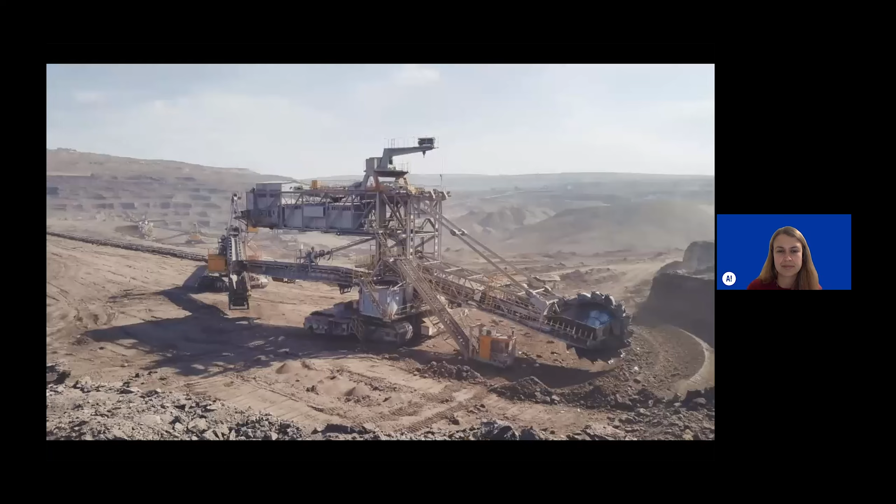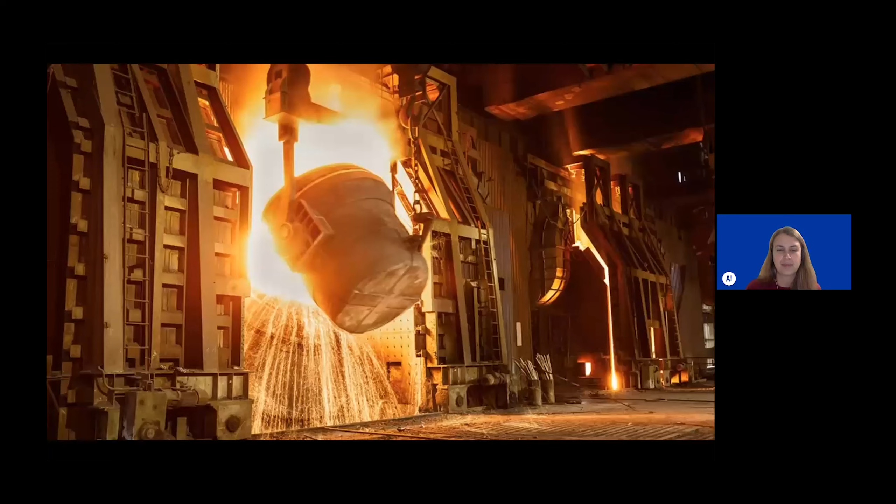So first off, what is embodied carbon? Well, it's the materials and processes that cause greenhouse gas emissions through the whole life cycle of a building or piece of infrastructure. This includes material extraction and mining, transport to manufacturing and processing, transport to site, construction on site, repair and replacement, refurbishment, demolition, deconstruction, transport to landfill, processing, and the eventual disposal of these materials and products.

Now I'm going to take you back to one of the slides we just pulled up there. This is the now permitted Whitehaven coal mine in Cumbria. It will be the first deep mine in 30 years in the UK. This will be extracting coking coal from beneath the Irish Sea for steel production. This is a real example of the link between buildings and the products we specify and the destructive processes that are still ongoing in this country and throughout the world. Embodied carbon emissions are a big part of this.

So through extraction, manufacture and construction - these are called upfront emissions. They're not all spread out over the process of the building's life like operational carbon emissions are, which means there isn't the potential to decarbonize and reduce these emissions later on. It's also really important to note that if you're working on a scheme that includes the demolition of a building, then the end of life emissions for that building will get added to the start of your project. So we urgently need to reduce these emissions in order to limit the devastating impacts of climate change.

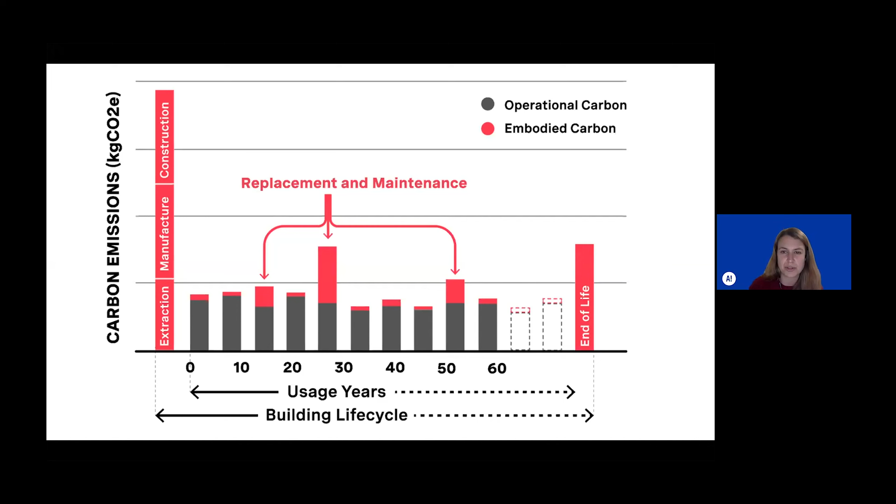ACAN also took part in the Future Home Standard consultation last year, as the proposals did not address embodied carbon in any real way. The Committee on Climate Change has said that substantial gaps and weaknesses remain in the government's set of policies for decarbonisation of manufacturing and construction, but there has finally been some good news.

The New London Plan has been approved, with policy SI2 referral scheme to undertake whole life carbon assessments using the existing methodologies to reduce embodied carbon emissions. Part of our campaign does encourage this policy to be adopted by local authorities for a wider range of projects. It's a great first step, but ACAN want to do more.

In order to start a campaign though, we needed to understand what has happened before and define a way forward. So we've produced this comprehensive report, The Carbon Footprint of Construction. This report sets out the nature and scale of the problem. It summarises the industry consensus on both lowering embodied carbon and the agreed methodology to measure. It sets out a series of recommendations with international precedents and a clear timeframe for policy implementation.

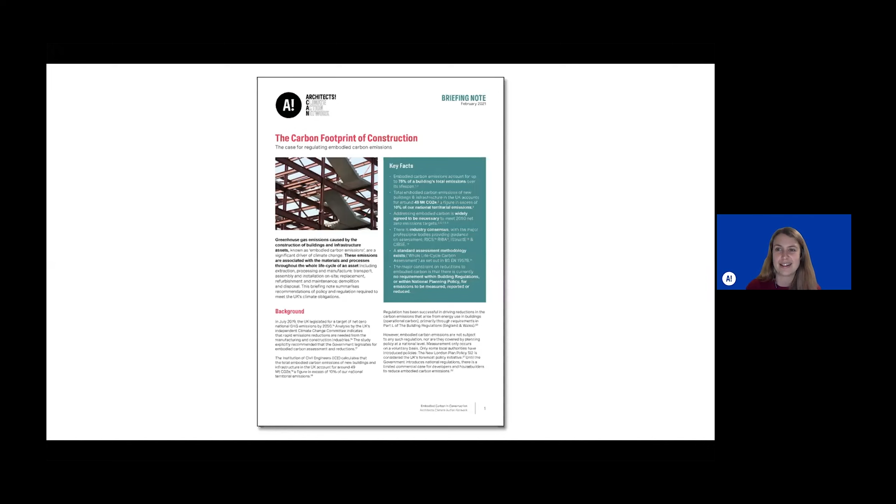For example, in France, they've introduced a regulation called E+C-, which has been running voluntarily since 2016. It requires the reporting of embodied carbon for all new buildings to take place this year, and limits will be brought in by 2024. It's a real example of how the UK government needs to take action now before they get left behind. And in order to help them do this, ACAN have set out a series of demands.

We demand that the government expands the building regulations to include a requirement to assess, report and reduce embodied carbon with a new Part Z. The government should also update Regulation 7 to introduce carbon limits on specific materials.

The National Planning Policy Framework should be revised to require whole life carbon assessments to be submitted at pre-app, full planning and practical completion stages. As an immediate measure, the New London Planning Policy SI2 should be adopted by local authorities throughout the UK.

And the government should create a freely accessible UK EPD database and require construction material suppliers to input EPDs for their products. This will ensure that as designers, we have all the information we need to make the right decisions. And the government should establish a freely accessible database for anonymised whole life cycle carbon assessment data of new buildings to ensure that lessons are widely learnt.

We've set out a time frame for when these actions should take place, and we've also looked back to see what's already happened to get us to this point. It's really important to note that in 2011, the British standard, which set out an agreed methodology for measuring embodied carbon, was introduced. And then in 2017, the RICS guide, Whole Life Carbon Assessment for the Built Environment, was published to give more information. ACAN are calling for the government to adopt the RICS guide

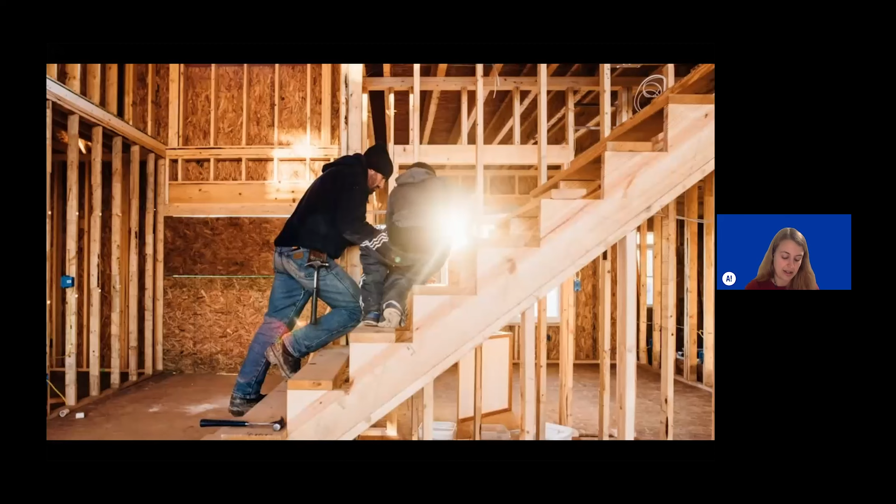There are also a series of benefits to these policies that go beyond carbon reductions. These include supporting the upcoming England tree strategy and boosting the UK's timber industry, creating green jobs in construction, forestry, production of UK materials, and science and innovation to explore low carbon alternatives, making construction sites cleaner, less noisy and less polluting, and providing an incentive to refurbish rather than demolish, supporting community cohesion.

The UK government's industrial strategy white paper said whole new industries will be created and existing industries transformed as we move towards a low carbon, more resource efficient economy. We need embodied carbon regulation to really enhance the opportunity that we've got here.

So what's next? We need you. Firstly, we need you to start talking. Talk to your clients, talk to your consultants, talk to your colleagues. If you're not discussing embodied carbon on a project right now, start.

But talking's not enough. The Department for Business, Energy and Industrial Strategy has reported that with profit margins and shareholder returns the overriding priority for the majority of large house builders, they will not upgrade their standards without being required to do so by regulation.

And that means what we really need you to do is become part of our campaign. Head to our website where you can see our Regulate Embodied Carbon campaign. From here, you can read our report, you can sign a petition, you can download the 2-pager and send it to your MP. We really hope that you become part of this campaign and we can move this forward.

I'm going to hand over to Seb, who will introduce some fantastic speakers and also run you through these actions in more detail. Thanks very much.

Now, if we look at architecture over 65 years, I would argue that we are well behind the curve in terms of innovation and development of thinking. So on the left there, you've got a London office building, 1955, 1970, and buildings going up today. And the conceptual thought, the philosophical thought, I would argue hasn't really changed at all. In fact, the building on the right probably has a higher embodied carbon than the one on the left.

Of course, it is probably more efficient operationally, but still it is fundamentally treading the same path. We have not had the innovation. And I would argue that all of those, in any event, are obsolete in terms of climate change.

If we look at this slightly more closely, on the left you've got a house built just before the First World War, by a well-known architect at the time, typical of things found all over Europe. Twenty years later, the Villa Savoye on the right was built by Le Corbusier. In between the two was an existential crisis, World War I. The building on the right is massively different in philosophy, design, shape, color, the whole lot. It is showing enormous progress.

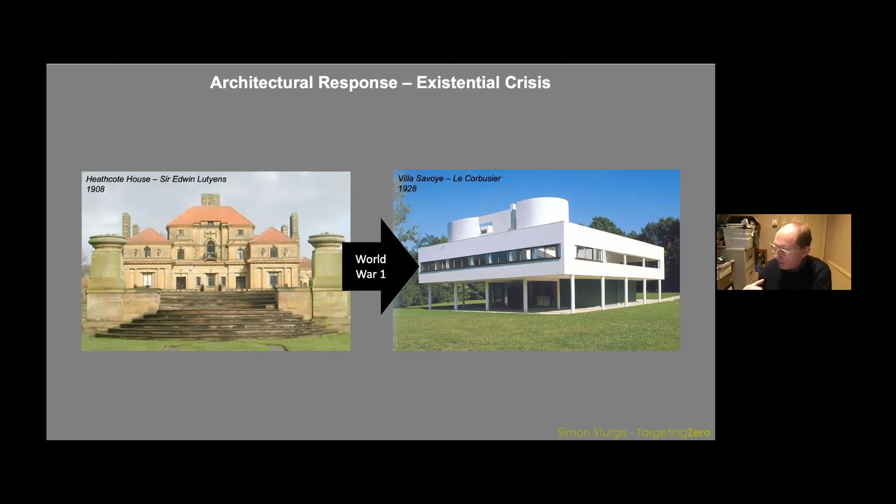But if we look at what's happened over the last 90 years, from the Villa Savoye to the House of the Year 2019, very little has happened. I don't want to pick on the building on the right - I'm just using that as an exemplar of today's architecture. I would argue not much has changed. Of course the insulation has got a bit better, and in that intervening period, around 1970, we had the oil crisis, so yes that introduced things like insulation and double glazing. But fundamentally, as a piece of design, that building has not progressed to the same degree as the change in the previous example.

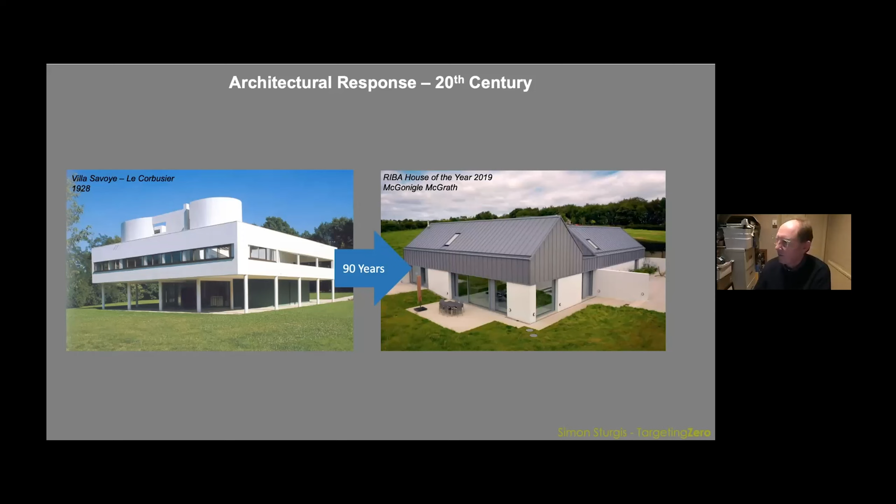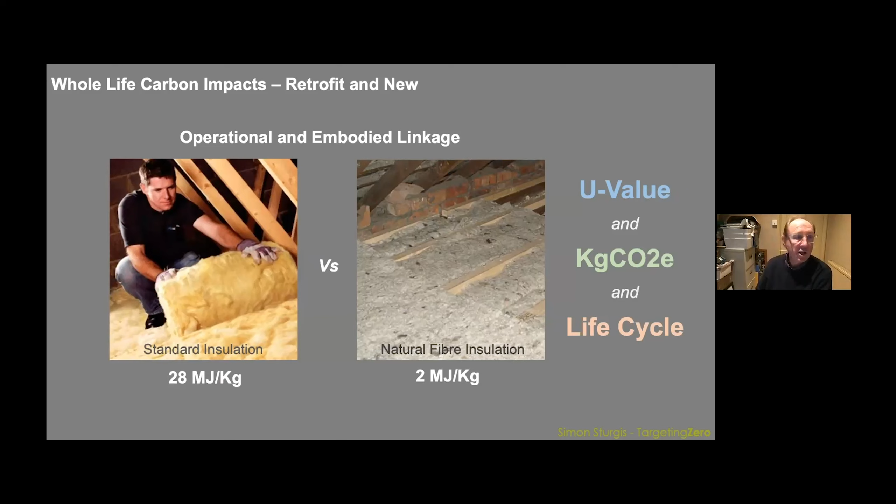So, the architectural response - I'll show you this as one example.

And of course, the building on the left compared to the building on the right is grossly inefficient in terms of material used to enclose space. It is also grossly inefficient in terms of the likely operational issues that come out of it. But certainly in embodied carbon, it is really problematic. But interestingly, the one that probably will win the prizes is the one on the left, as opposed to the one on the right, which is not that exciting, but it is compact, it's efficient, and it will do a good embodied carbon job for enclosing space.

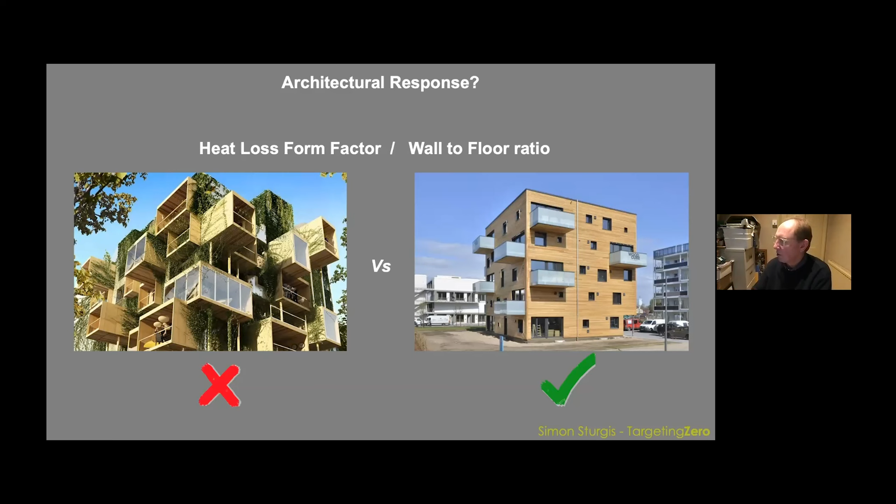A word on cost. One of the problems we face constantly is the fact that sustainability generally is seen as an expense. And I think this is generally because it's meant additional things, like you have to add things onto buildings, PVs, triple glazing, additional insulation, and so on.

But this was a study we carried out for a developer in London. This building was actually completed when we did the study. On the right there, you can see four columns. The left-hand two columns represent, on the left with the figure 850 on top, the as-built carbon cost of that building. The next one, with 506 on top, represented a range of options that could be chosen to reduce the carbon footprint of that building. It would have looked the same.

It would not have involved radical technologies. It would just have been a question of choosing better materials and using them more intelligently. And on the right there, you've got the as-built life cycle emissions. Now, the interesting thing is that 41% reduction is actually quite high. You wouldn't normally expect necessarily quite such a big improvement. But nevertheless, the QS was asked to look at this by the client, and they said that 75% of those reductions were cost neutral, and about 25% were worth tendering anyway.

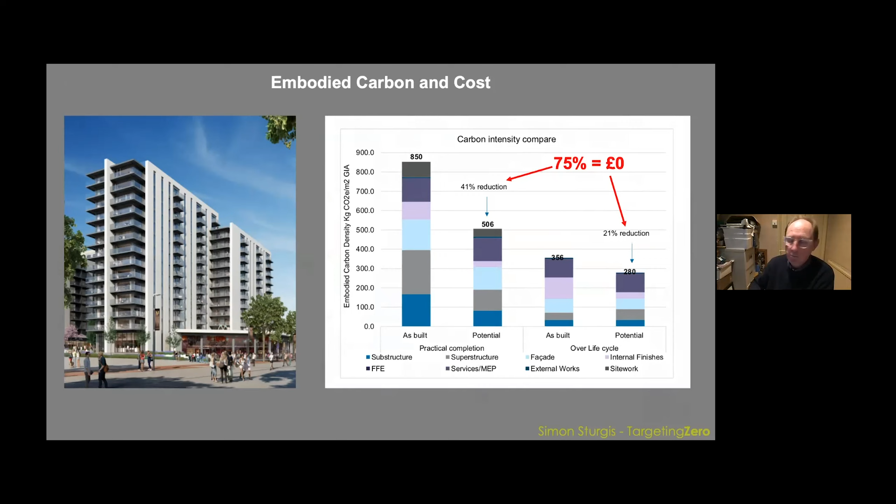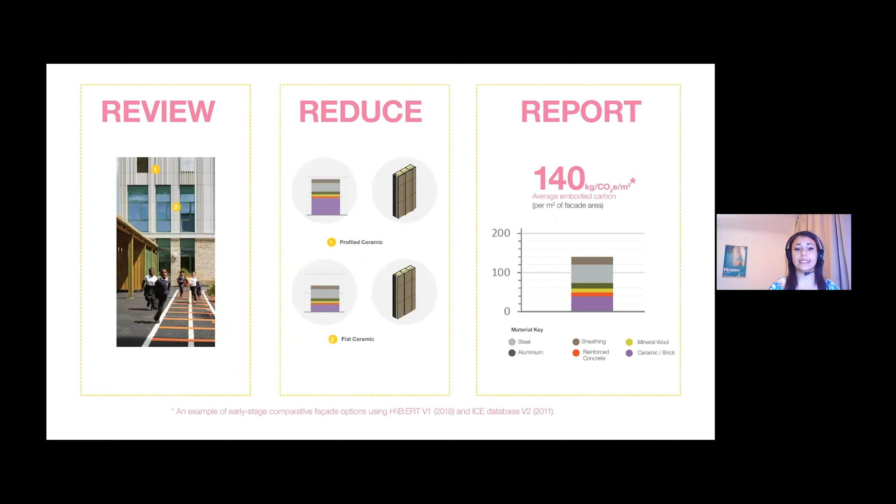But to round up, the key message I want to get across is to review, reduce, and report. We need to be reviewing at all stages of design, reducing where we can, and then reporting and sharing that data in a consistent format. I'll end with this quote from the Centre for Alternative Technology's Zero Carbon Britain publication.

Thank you very much indeed, Raheela. It's a stark reminder of the urgency of the challenge, but also the power of our professional agency and how much it can dwarf the changes we also need to make in our lifestyles.

Another action I'll briefly mention is we're asking you to write to your MPs outlining the need for this regulation. This is something we've done on previous campaigns you may be familiar with. On our website we have a template for your MP that you can download, and it takes about 5 to 10 minutes to write to them. We've even got a link to help you find your local MP if you're not sure. If you do this, please let us know of responses you get from MPs—we track and manage that so we know how things are going and can shape our campaign accordingly. We've found this to be a really useful strategy in previous campaigns like the Future Homes Standard.

Our third speaker that I'm going to pass over to now is Matti Kuittinen. Dr. Matti Kuittinen is an architect working at the Ministry of the Environment in Finland as a senior specialist. He also teaches sustainable construction at Aalto University as an adjunct professor. Matti is at the leading edge of embodied carbon regulation as Finland works towards introducing regulations by 2025. As a campaign team, we've already been hugely inspired by Finland's stance of doing what is necessary and not just what is seen by some to be possible. Thank you, Matti.

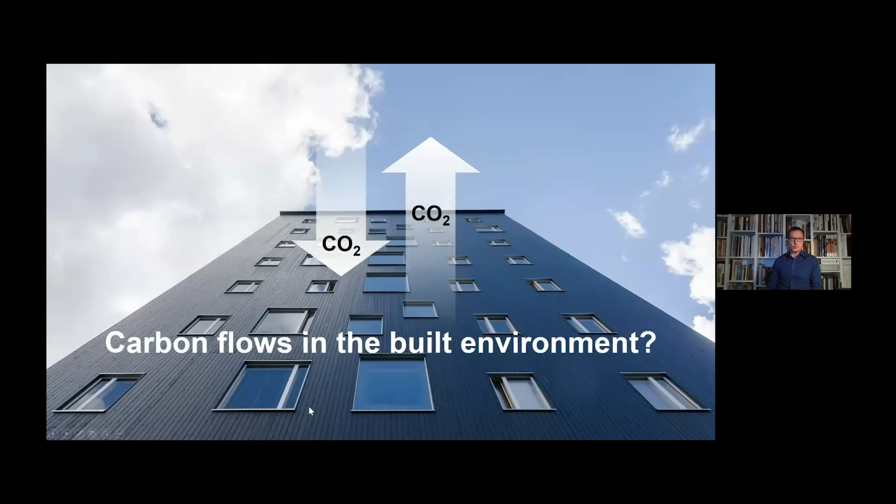What we've planned to do is set limit values for the carbon footprint of buildings well before year '25, as part of our national climate goals. These limits will be building-type specific, and we plan to gradually make them stricter. But this carbon footprint side is only one side of the coin.

I believe that for creative minds and architects, it's very important to also look at the other side, which is how to actively solve the problem. That's why we are also planning initiatives for increasing climate benefits in the built environment. I believe this hasn't been discussed so much, but it's important to take this side of the equation into account.

There's also the psychological benefit of it. I'm pretty sure nobody wants to confess their environmental or climate sins day after day, year after year - it's depressing. So I think it's good use of the creative minds of architects, engineers, and designers to turn their attention also to making things better, not only trying to be less bad, but trying to be more good.

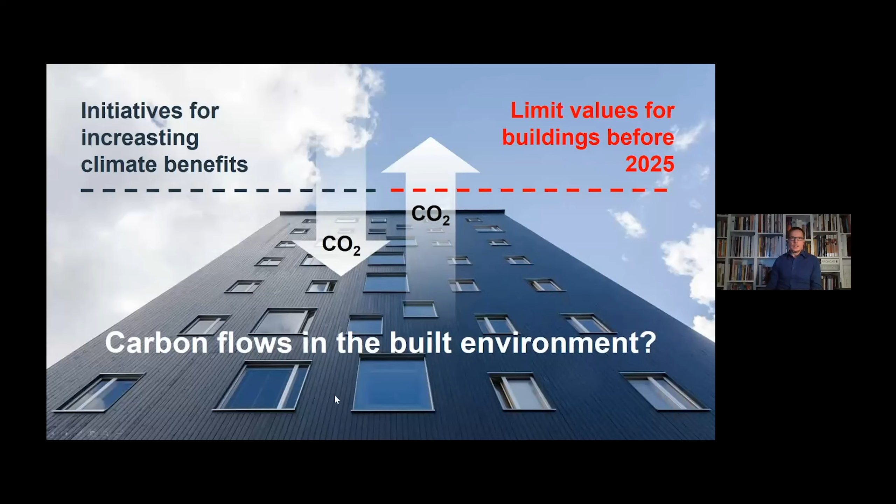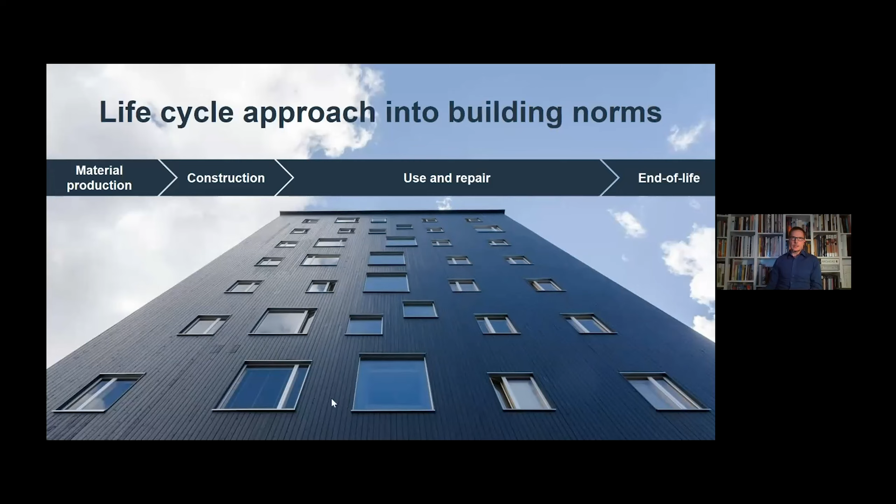The way to approach this is to take the life cycle approach into building norms, and that's what embodied carbon or embodied emissions is all about. In our case, we'll be having a mandatory climate declaration of buildings that you need to present to your building permission authorities when you apply for building permission.

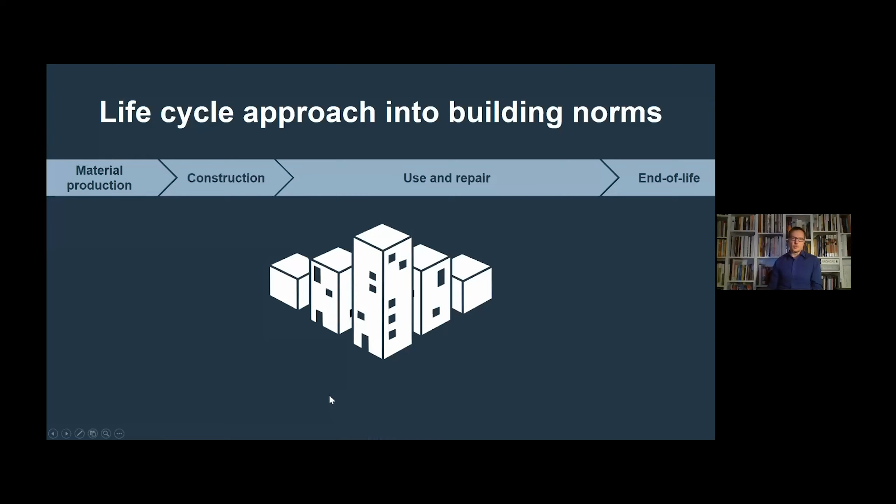And there we will be looking at the carbon footprint or emissions caused by the buildings over the full life cycle, and there will be limit values. If you exceed those, you will not get a permit.

This will apply to new buildings, and for refurbishment projects we will have a mandatory climate declaration, but there won't be any limit values, because it wouldn't make sense to prevent you from addressing indoor moisture problems or indoor air problems just to hit climate targets.

The other side, the carbon handprint side, is also about to be a mandatory requirement to report. There we will not have any minimum limits. But this sounds like something that could be a dream for a greenwasher, so we have very carefully selected only the sides or ingredients of the carbon handprint that can be quantified with either EN or ISO standards.

There we have net benefits from reuse, recycling, or energy recovery from products at the end of their life cycle. Then we have long-term carbon storage in bio-based products such as wood, but we also have carbonization of cement-based products, which can help as well to a certain extent.

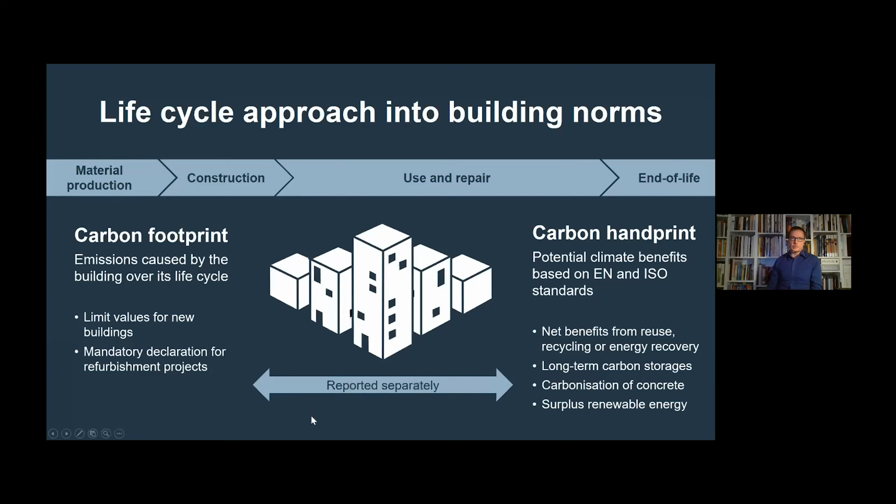And of course, buildings could create more energy than they consume and thus help things evolve in a better direction. Both of these are important, but it's equally important to report them separately so things don't get mixed up. The essential toolbox for doing all this is the assessment method.

In the UK, you've had very nice publications over the years from professional organizations guiding professionals on how to do LCA or carbon footprint assessments. A few years back we published the first national version of that, and in a few weeks we will publish the regulations of how that will be done - taking the thing to the next level.

It has some legal complexities that need to be addressed, but they are doable - it's not rocket science. Then, of course, we need to have the database, which was mentioned in the previous presentations. In our case, we're looking at a generic database, not an EPD database, because in the beginning of the design process you don't necessarily know from which producer you'll get your bricks, your windows, or your mineral wool.

So we need to have this generic information also available, not only for products, but also for building processes, for transport modes, for construction site activities. And it's important to include in this database the planned decarbonization of grid energy according to national climate goals. Otherwise, your LCA is going to show biased results.

Last but not least, we need digitalization. This can make our work so much easier. I'm referring to architects, because there's repetitive, boring work of going through inventories, which is prone to human errors. So why wouldn't we put machines into doing that boring side of the work?

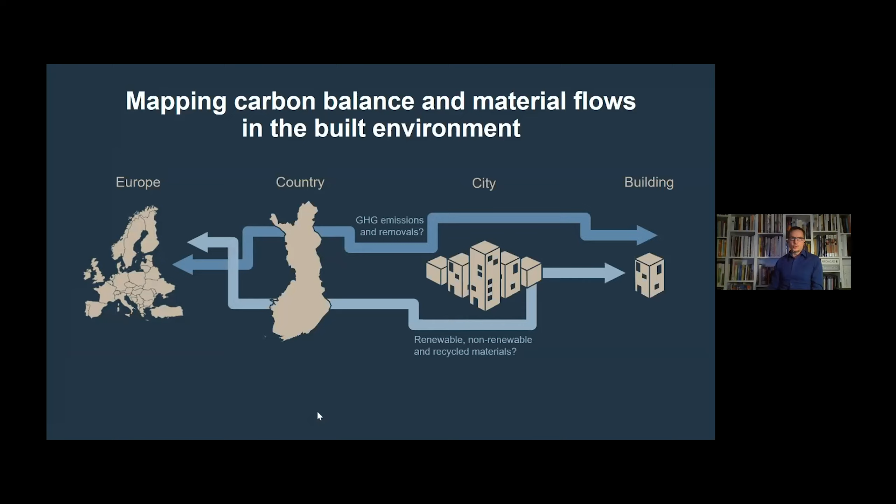It's important to understand how the greenhouse gas emissions and removals that accumulate from a single building project support citywide, national, and European policy goals. It's equally important to look at material flow, because climate action and circular economy are so tightly related. That's why we are building a digital platform for tracking and managing all this.

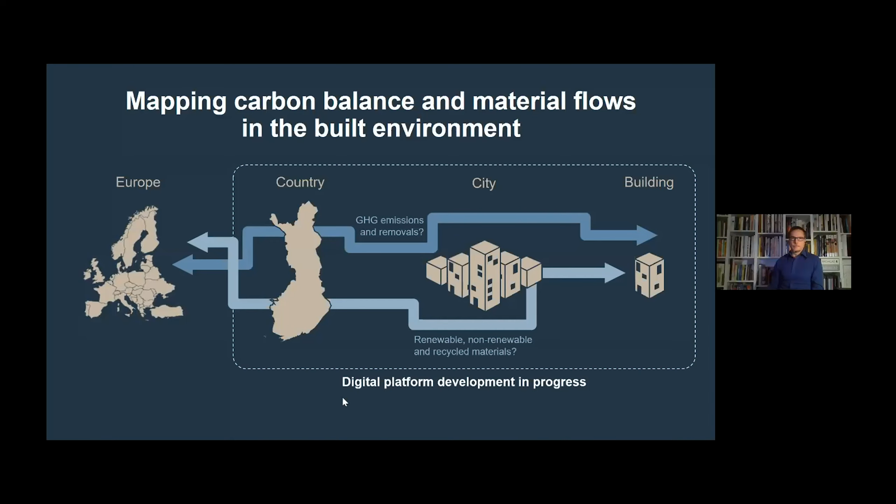I'd like to finish from where we started. If we can achieve this, we hope it will be a considerable help in our quest of becoming carbon neutral and carbon negative.

This quote actually comes from the Finnish Grandmaster of Architecture, Mr. Alvar Aalto. Today happens to be Alvar Aalto's birthday, and it's National Architecture Day in Finland. So I'm very pleased that the ACAN network chose this specific day for the launch of the campaign. I wish all the good for the campaign, and happy Alvar Aalto's Day. Thank you.

Thank you, Matti, that was absolutely fantastic. I really appreciate that you reminded us, firstly, that this is not rocket science, and we have better technology on our side than when the British Standard was first introduced over a decade ago. But also that while we've been talking a lot about carbon, there are much more complicated things we also need to be considering alongside this.

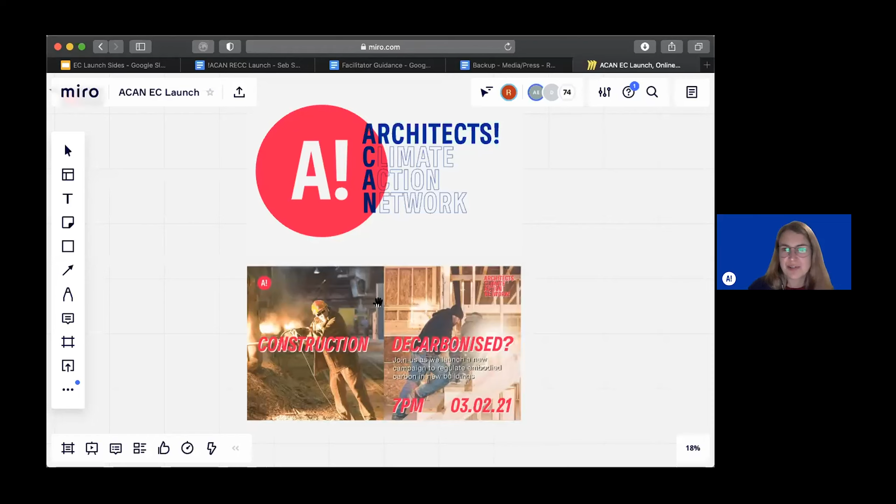Thanks very much, Eve. Yes, so for those of you that haven't used Miro before, hopefully you should all be able to see my screen now where I've come onto the Miro board, and you'll come onto a screen a bit like this. If you zoom all the way out with your mouse, you can see that there are a number of areas on the board. So if you zoom into an area, you can see this one's about media and press, and we've started to think about initial questions that will start off your conversations.